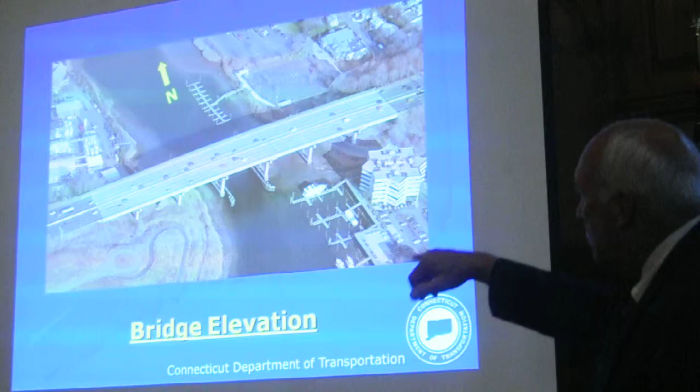The left corner is called Oyster Shell Park. That's a park that comes under the jurisdiction of the Norwalk Parks and Recreation Department. And we have two marinas, one upstream and downstream on the east side of the Norwalk River.

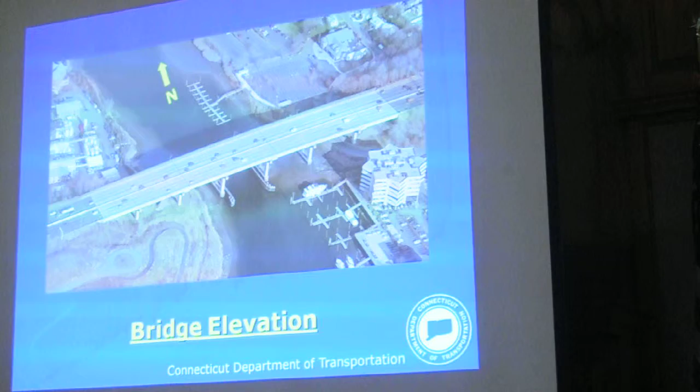Next slide, please. This is Hendricks Avenue. Hendricks Avenue is on the east side of the Norwalk River. It is the only local road that's within the project limits. This is a view looking south. You can see that under this project there is no proposal to do any kind of improvements to Hendricks Avenue. Hendricks Avenue will remain as it is.

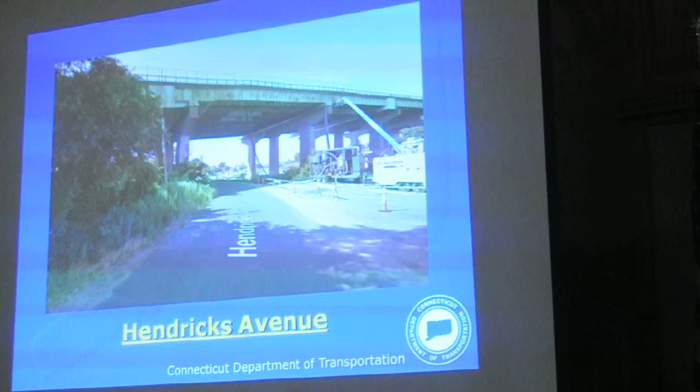We'll be doing some work on the bridge above Hendricks Avenue, mostly having to do with painting the structure and possibly some deck repair work on the underside of the deck above Hendricks Avenue. There are no plans to provide any closures. Hendricks Avenue will remain open to traffic for the duration of the project.

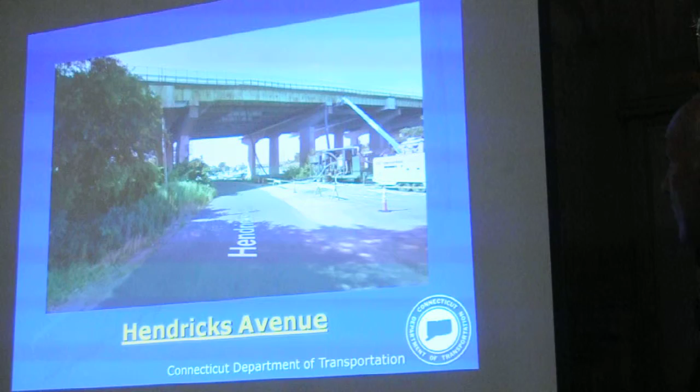Next slide. Just a view of the typical topside. What I'll point out to you here is this is the median barrier. The median barrier separates the northbound and southbound traffic. Just to give you a little bit of perspective, this bridge was completed and opened to traffic in 1958, 57 years ago. Actually, the last major rehabilitation project on this bridge was done in the late 1980s.

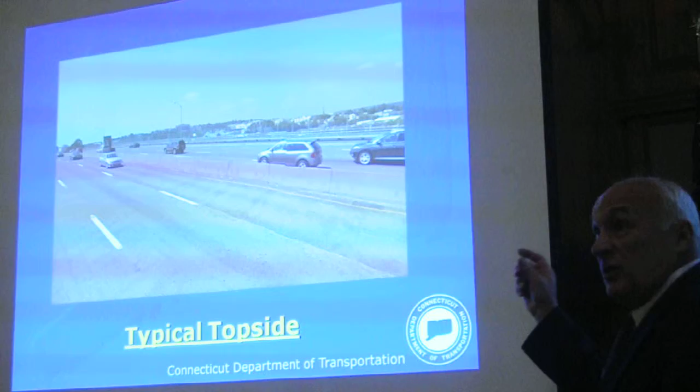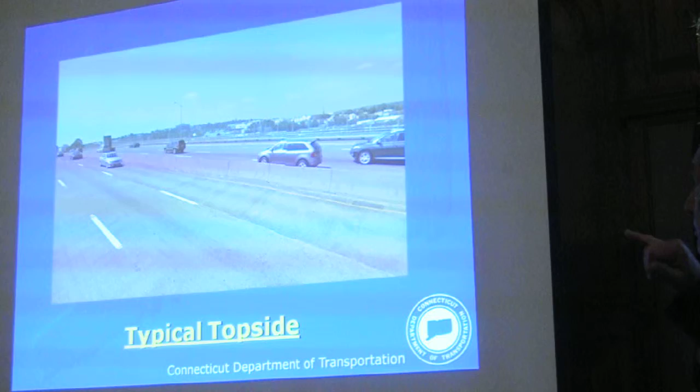Originally, there was just a metal guide rail that went down the median of the bridge. And in the 1980s, they replaced that guide rail for safety improvements, and they put this median barrier in there. That median barrier is 32 inches high. And at the time, in the late 1980s, that was the standard for median barriers. Today, that standard has changed. In the interest of safety, we now put 45-inch high median barriers down I-95. Next slide.

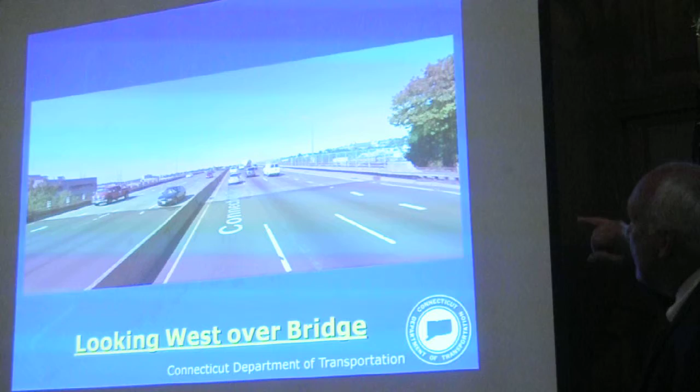Looking west towards New York. What I need to point out here is that there's a 5-foot sidewalk on the outboard side of the shoulder parapet on this bridge. And then on the outboard of that sidewalk is an 8-foot high pedestrian fence. The sidewalk has access from both East Avenue and West Avenue on either side of the river.

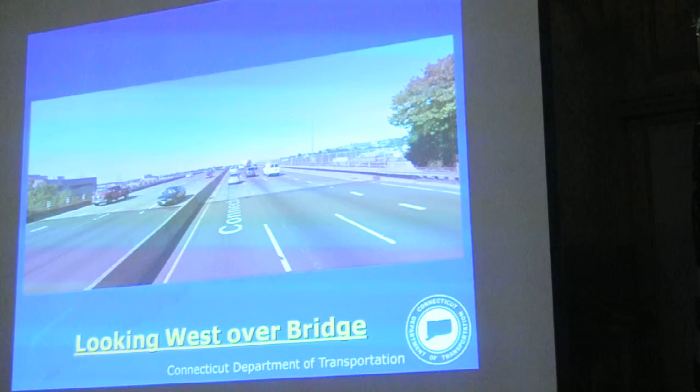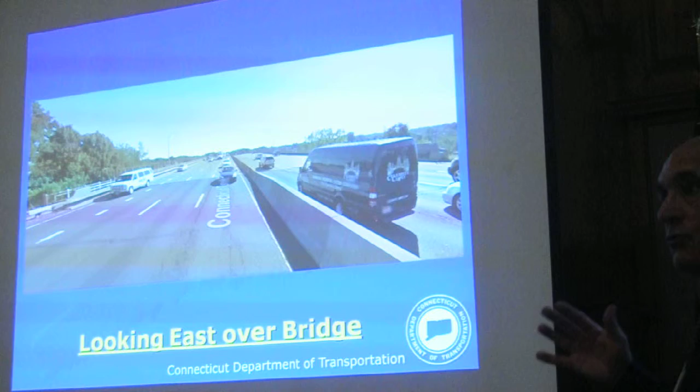The only other thing I'd like to point out, in each direction there are 4 striped traffic lanes. The 3 traffic lanes closest to the median barrier on each side are the through traffic lanes. And then on the extreme outboard side of each direction is what we call an operational lane. On the westbound side, it's an operational on-ramp from East Avenue, and then an off-ramp onto Route 7 and West Avenue, and just the opposite on the eastbound lanes.

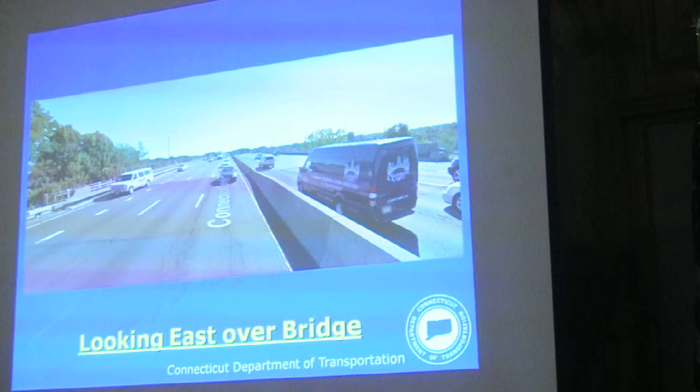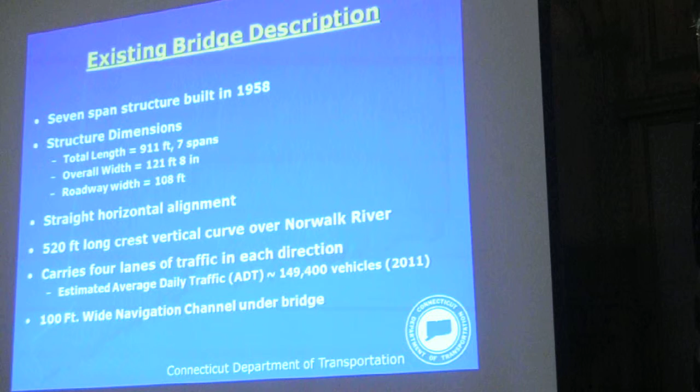I don't want to get too technical, but just to give you some idea of what this structure consists of. I already mentioned it went into service in 1958. Construction was actually started in 1956. It took 2 years to construct this bridge. It's 911 feet long from end to end. It consists of 7 spans, 115 to 135 feet in length.

The overall out-to-out width from parapet to parapet is 121 feet 8 inches. And it's got 108 feet of roadway width. What that means is we have 4 12-foot travel lanes in each direction and 3-foot inside and outside shoulders in each direction. If you add that all up, it's 108 feet of roadway. It's on a tangent, it's straight, there are no horizontal curves to it. Vertically, it's on a crest curve, so the center of the bridge is at the crest of a vertical curve.

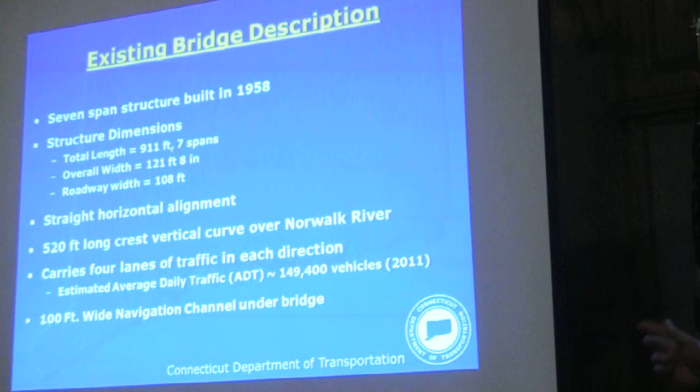The average daily traffic, ADT, was reported as 149,400 vehicles. That was taken in 2011. I already mentioned there's a 100-foot wide navigation channel under the bridge, which comes under the jurisdiction of the U.S. Coast Guard.